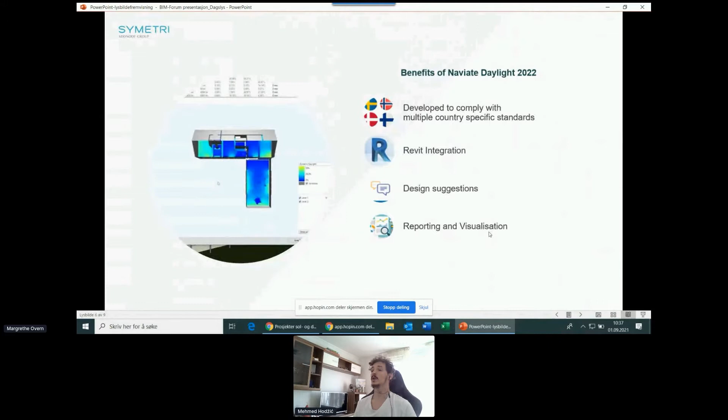When it comes to the benefits, I just wanted to briefly talk about the benefits of Daylight and make some key points clear to you. One of the main key points is that we have developed Daylight to comply with local country-specific standards. All the Nordic local standards are supported within Naviate Daylight. All the different rules that each of these standards require, Naviate Daylight will automatically analyze for you and provide you with accurate data, and accordingly you will know how to act based on the output we give you. So that's a really good feature that Naviate Daylight provides.

Then the second key functionality that Daylight has is the Revit integration. In the beginning, we were aware that a lot of other simulation software requires a lot of external or pre-analysis preparation, like exporting your model and then importing it into another third-party software and doing a lot of other things in order to get your analysis done.

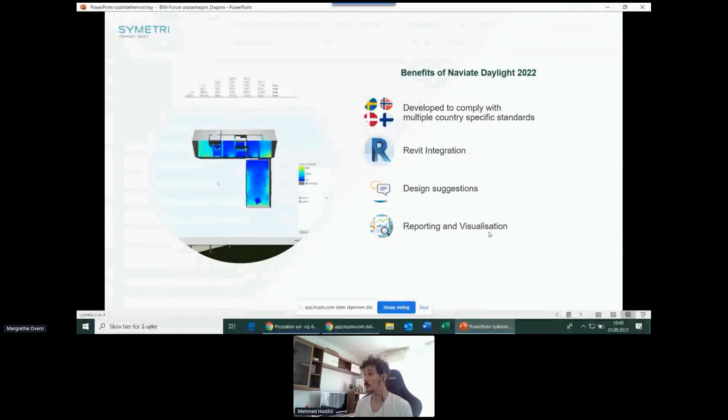These two first key points we are focusing a lot on, in order to give you the best and most straightforward experience when it comes to doing simulations. So basically you don't have to do a lot within Naviate Daylight. You just select which floor plans or rooms you want to calculate, and Naviate Daylight will do everything for you. So the key points for these two are automation, integration, and compliance with different local standards.

Then some more functionalities that are making your life easier, like the design suggestions that Naviate Daylight provides to you. These design suggestions will guide you through the daylight simulation process and the results you get. Based on the results that Naviate Daylight provides, we will give you design suggestions for what the shape of your room should be and what the windows should be, all based on the regulations you have selected for the analysis.

We are supporting Swedish, Norwegian, Danish, and Finnish regulations, by the way. So the design options are quite a good guiding star for you within the simulation process.

And then, of course, we will reinforce all of that with some quite good reporting and visualization functionalities, so you will always know where you are and where you can be with your simulation process. So yes, those are the main key points, and now I would like us to move to the recording.

Yes, I will stop sharing, and you can take the lead for the videos. So I'm just going to share the YouTube video, right? Yep. Yes, you just copy it and share the video. Yes, perfect. There we go. Just a second.

Okay, so I'm going to play the video now. The project that I want us to look at is a 4-story high residential apartment building, and let's say we want to check the daylight performance for apartments found on level 2. So let's see what we have there. On level 2 we have 4 apartments, all 3-bedroom apartments, and we want to calculate the daylight performance for the living areas and the bedrooms.

When it comes to the bathrooms, hallways and storages, they do not require any daylight, so we will not include them in the calculations. I will only select the rooms that do require daylight, which as we said are the bedrooms and living areas. For that, I already have a selection saved, apartments B. So on this floor plan, we will have 16 rooms that require daylight.

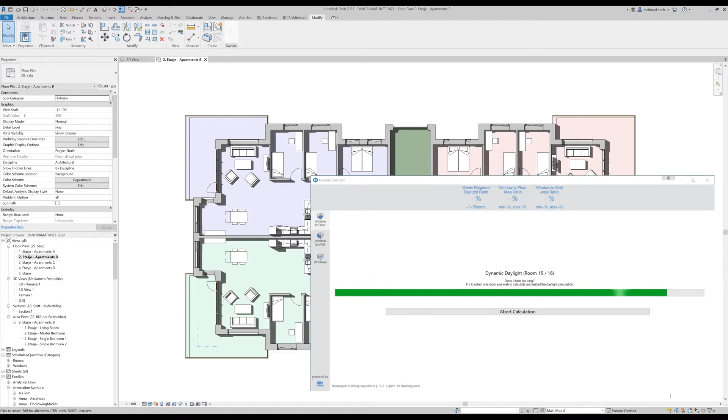Basically, after you have made your pre-selection of rooms, in the Modify tab you will be provided with a Naviate Daylight command, which you can just run and the calculations will start immediately. For the purpose of this demo, I have increased the speed of the calculations so they will not take much of our time. As soon as the calculation finishes, we will be provided with a complete set of daylight data, which we will review in just a moment.

This is the output that Naviate Daylight provides to you. You will be provided with a list of all your rooms that you have chosen for the daylight calculations, and an extensive set of daylight data for each of those rooms. The most important data for you is to be able to see if your rooms are meeting the daylight ratio requirements. That's one. And if your rooms are meeting the average or median daylight factor requirements. That's two.

Some additional data you can see here are the minimum, average, and maximum illuminance values provided by the calculation engine. Additionally, you will see what the calculation height for the daylight factor calculation is, and you'll be able to set it for each of these rooms individually.

Some additional things you'll be able to see are the floor area and the actual and corrected glass area for each of these rooms, which in the end will give you the daylight ratio results.

But when looking at this dialog from a distance, you'll see that on the left side we've provided some green and red indicators for you. Basically, they tell you if each of these rooms is meeting the daylight ratio and daylight factor requirements based on the selected standard.

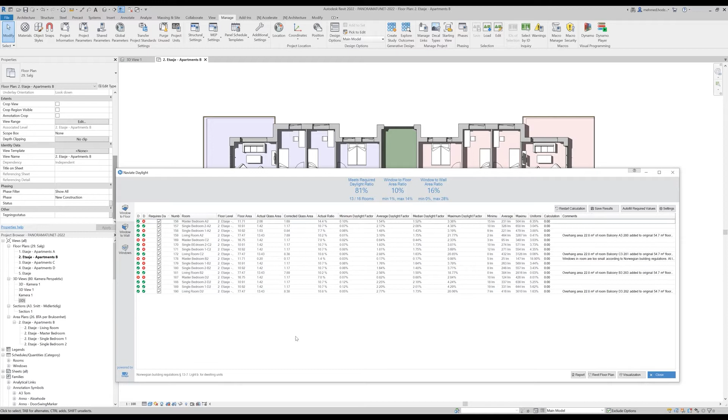That was kind of the overview of the data that we provide to you. I'm going to go back to the main dialog and show you some additional functionalities that we have here, like for example the autofill required values option.

This tool gives you the possibility to predefine some custom required values for certain rooms. Basically, you define a list of rooms and define what the required ratio and daylight factor value will be for those rooms, and define what the calculation height is. Those values will be used only for the rooms you have specified in this list, which can be quite a useful feature when you want to make some specific modifications for certain rooms. But I believe the configurations we are providing are quite enough to do the calculations correctly.

One other functionality that's quite useful is the save results functionality. This one saves all the daylight data we provide and have mentioned here directly on the elements. So it will save the data on the rooms as instance properties—your rooms will get some additional daylight parameters, as will your windows. These parameters saved on the elements can be reused in scheduling and basically however you want later on. So that's another quite nice feature you can use.

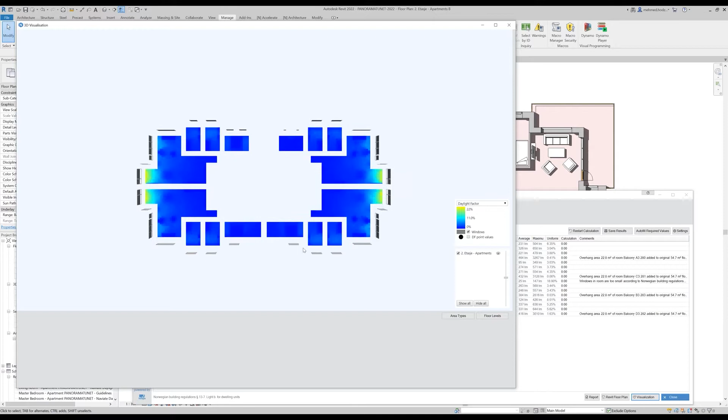One brand new feature is the possibility to show the daylight heat map directly on the floor plan. Before, we had a 3D visualization pop-up dialog that gave a simplified representation of your model or floor plan with the rooms found, and a heat map that had quite a few limitations. Our customers expressed a big wish to make changes to mitigate these limitations.

For example, the possibility to change the color mapping values. By default, this visualization used fixed minimum, average, and maximum daylight factor values to show the colors on the heat map, which, as you can see, tells you these rooms are not getting a lot of light, because the gradients were not set correctly. That's something we will fix with this new feature.

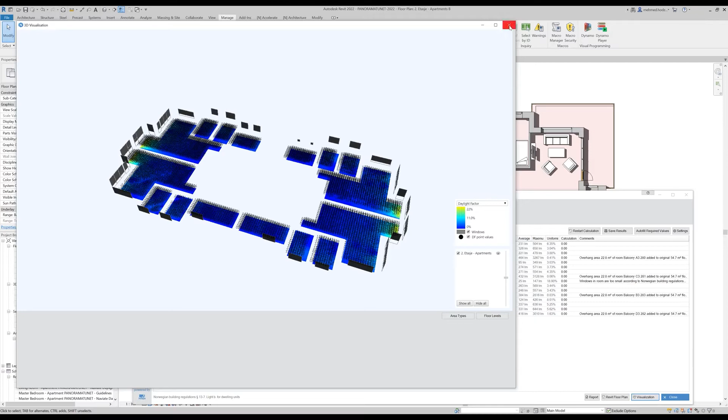When it comes to showing point values, this 3D visualization pop-up dialog didn't provide very good results. The performance was not that good, and the overview of these points was really bad. So we decided to make the necessary changes and provide a much better experience when it comes to showing and working with the heat map itself.

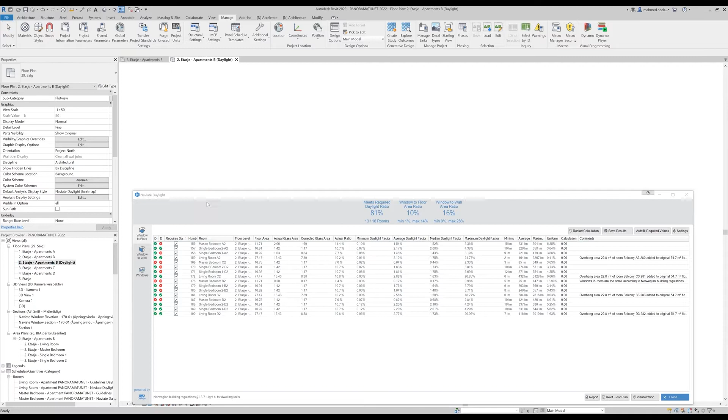In the upcoming version, you will have the possibility, by clicking on the visualization, to create a separate floor plan and show the heat map directly on that floor plan. As you can see, this looks much better now, and this heat map provides much more functionality when it comes to modifying it and working with it.

In the instance properties of the floor plan, you have the option default analysis display style. This is a Revit functionality that we reused within our tool to show these analysis results. Here you can select the heat map style - in our case, this is the Naviate Daylight heat map - and you can also use the point values heat map, which I'll show in a bit.

When it comes to changing the color mapping, here you have all the possibilities you need to change the different values or colors on your heat map. For example, instead of gradient, I could use ranges, so I could better and more clearly see which parts of the room are below the 2% rule in this case, or if I change this to 1 and apply it, which parts have less than 1% daylight factor.

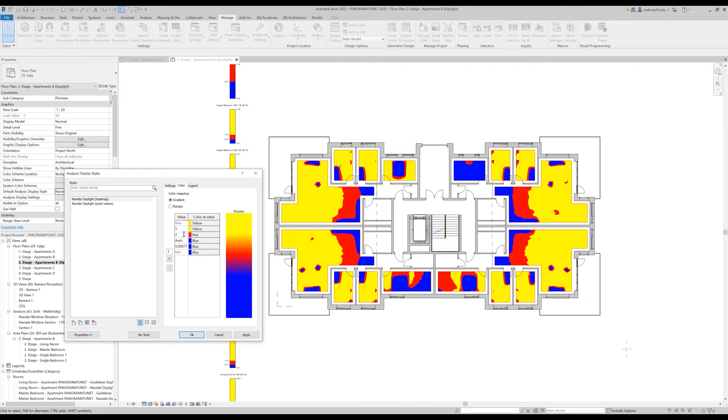When it comes to showing different ranges, you have the possibility to do that. Or even if you only want to show the parts of the room that are above 2% and the parts that are below 2%, you can do that with these options.

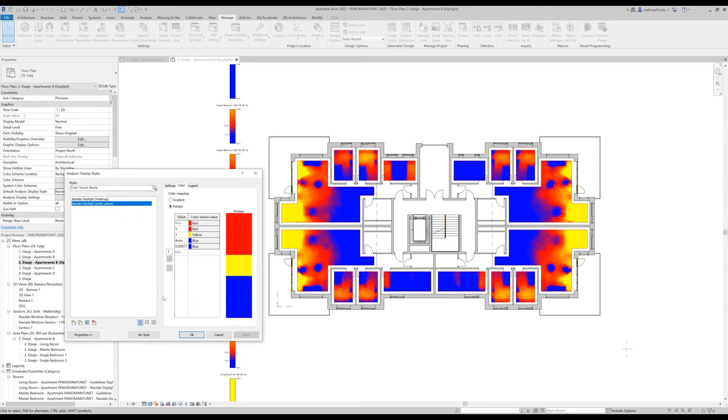You can also show the point values here. If I click on this style, you can create your own styles - either a heat map style, color surface, or markers with text, which is the point values style. So if I click on this one, and click OK...

You can see the grid points shown in the exact same colors as for the heat map, and that's also something you can change. If you want to show the point values here, you can do that, but in that case you will need to make some changes to the scale of the plan view.

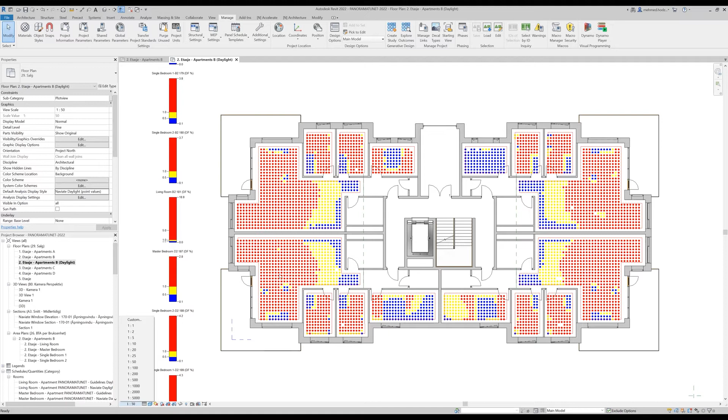For example, if I want to show the point values or text values of each of these points, I'll need to change the scale to be smaller. So for this point to be smaller, open up the style again, and under text annotation you can change it to show all, apply, and OK. Revit performance decreases a little bit, but if you have a better machine, that's okay.

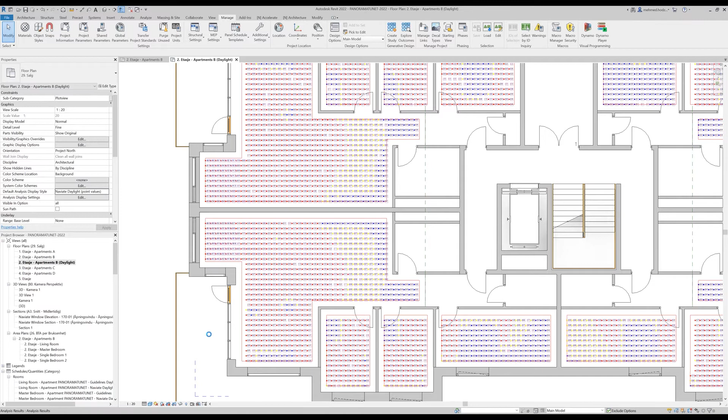Now you can see each point value individually and figure out which parts of the room have less than 1% or 2% daylight factor. So all the possibilities needed to document an appropriate daylight report will be provided to you.

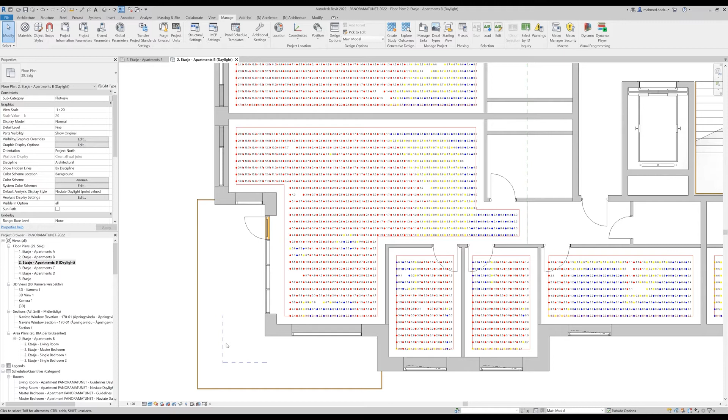If you want to save this in your project, the best way is to save this view as an image, which you can do by right-clicking on it and selecting save to project as image.

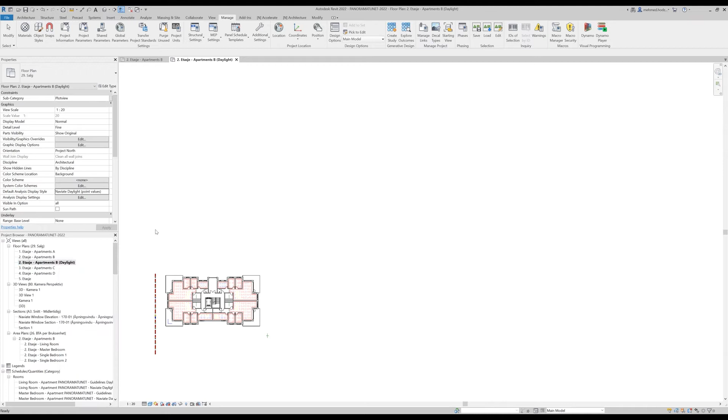But I'm going to bring this back to the heat map. As I said, this new feature provides all the necessary functionalities that were wanted in order to make the heat map functionality useful in its best possible way.

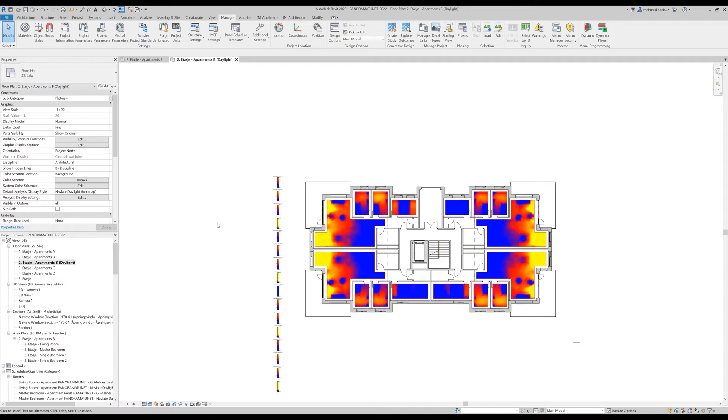So one last documentation functionality that I want to show you is the report. And actually we have one more floor plan documentation functionality, so to call it, and that's the daylight ratio functionality. Basically you can create similar floor plans as for the heat map, but those floor plans will be only related to daylight ratio, as this one is only for daylight factor.

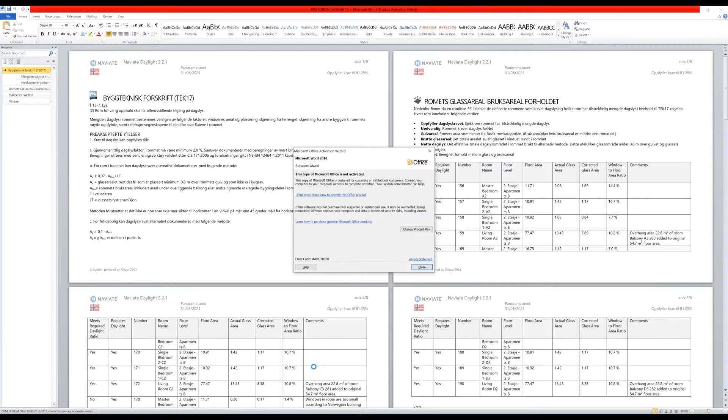And the last one that I want to show you is the report option, and this one generates a report out of the data that you see here. So you will get an automatically created Word report which will be available to you to share with your colleagues or share with a daylight consultant, so they can review the data and give you their opinion. So this is how it looks.

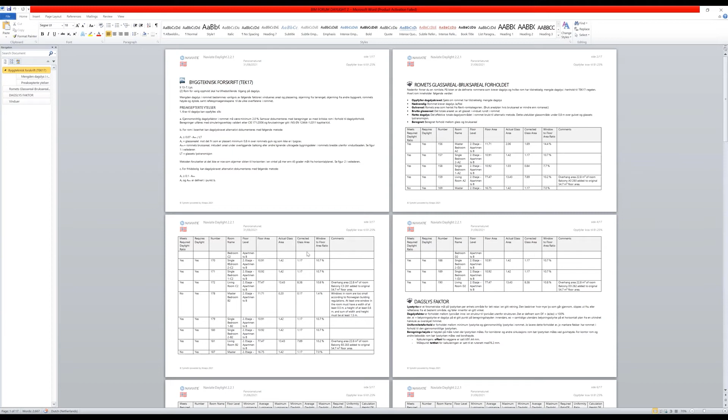We have templates provided for each different country standard. These can be modified, so you can look up these templates in the directory and you can remove any columns that you don't want to show in this report, and you can use your customized template to generate this report. So pretty nice functionalities when it comes to documenting. And I think that was basically it when it comes to documentation.

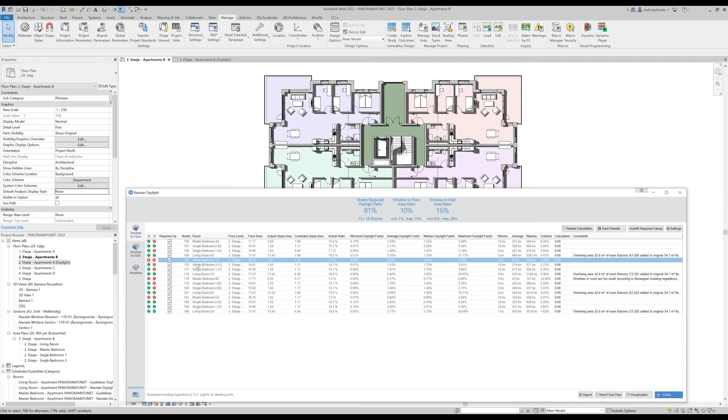I would like to conclude this demo by showing you what the workflow with Daylight is when you want to make the necessary changes in order to meet the requirements of your selected standard. So, for example, I'm going to go back to these indicators here. For this room here, I would like to see what I can do in order to make this room meet the requirements. It doesn't meet both daylight ratio and daylight factor.

I'm going to double click on it. As I can see, no comments provided, so the shape of the room is good, or it follows the guidelines, and the size of the window is okay, but still it doesn't get enough light. As you can see, the average daylight factor is 1.64, which is quite small, and the actual ratio is 7.0, which I guess we are rounding up the values, so that's why it says that it's not meeting the requirements. But anyways, the daylight factor is not satisfied. I'm gonna add one more window in that case, the same as this one.

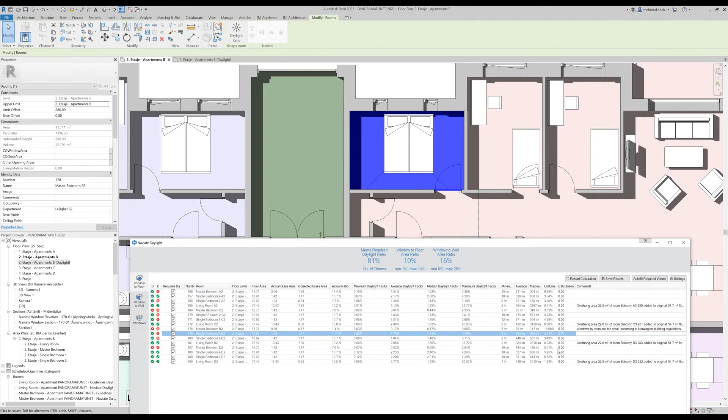And I can do some more changes to some other rooms, like for example this one, B2. If I look more closely, I will see that these windows are quite small. And also when I look at the comment section here, it tells me that the windows in the room are too small according to Norwegian building regulations. And if you hover over it, it will give you more details about the least window width and window height.

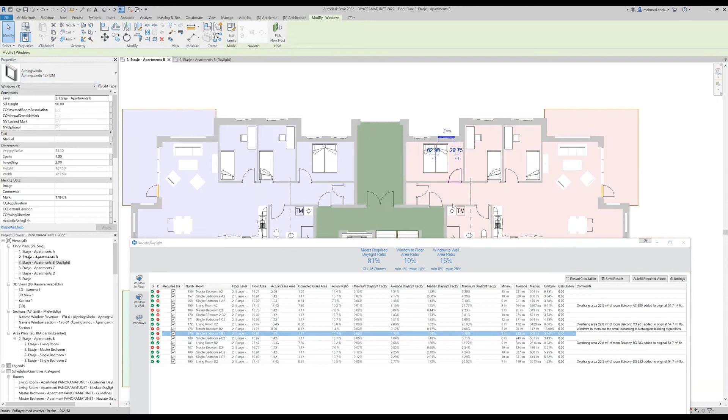But anyways, I can see that they are too small, and the height and width are 52 centimeters, which is quite low. I'm just gonna change the type of the window to be something larger. I'm gonna use these windows. Okay, then let's see some other rooms that are not meeting the requirements, like for example this one. Double click on it. Okay, this is the same room as this one. I'm just gonna create one more window here.

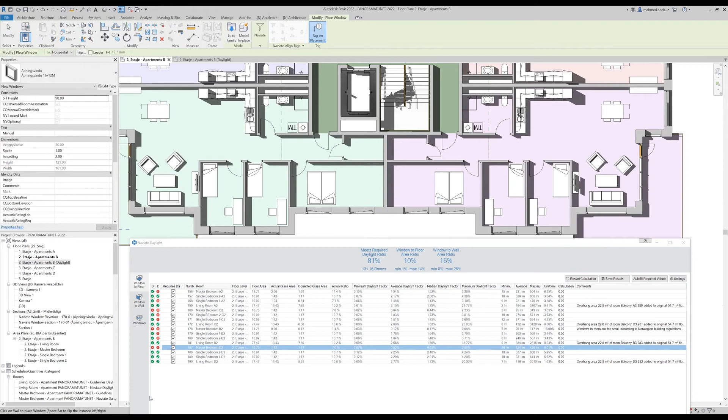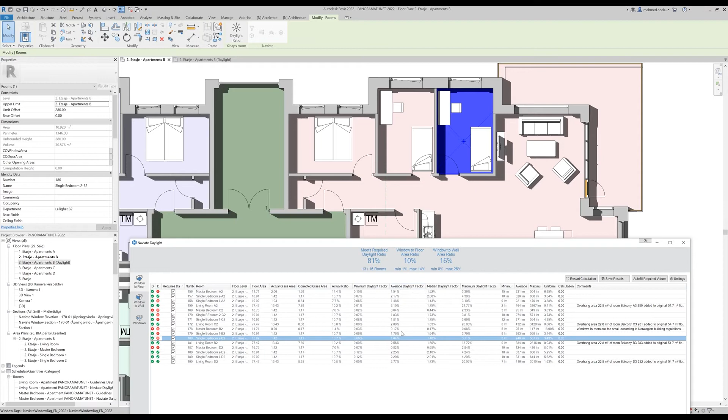Okay, single bedroom. Which room is that? Okay, this room. It meets the daylight ratio requirement, but it does not meet the average daylight factor requirement. And as you have seen in the heat map, these shadings here are due to the furniture inside. The bed is creating this shading, so that's not something that is okay with the regulations. That's not a common way of doing the analysis.

So I would say that if I removed this furniture in each of these apartments and reran the calculation, all of these rooms would meet the requirements. So I think I have made all the necessary changes within this floor plan. In that case, I'm just going to select these rooms again and rerun the calculation.

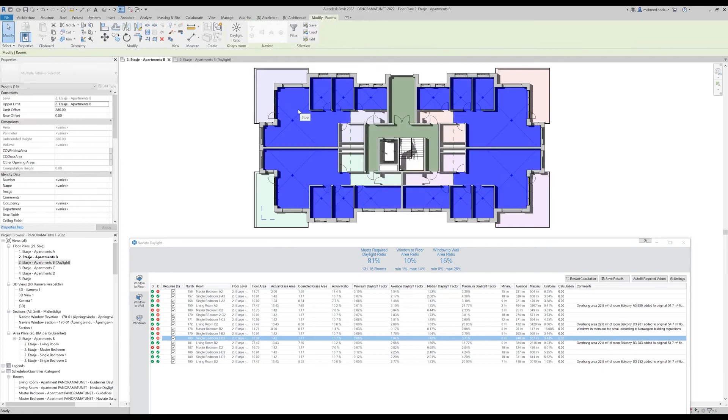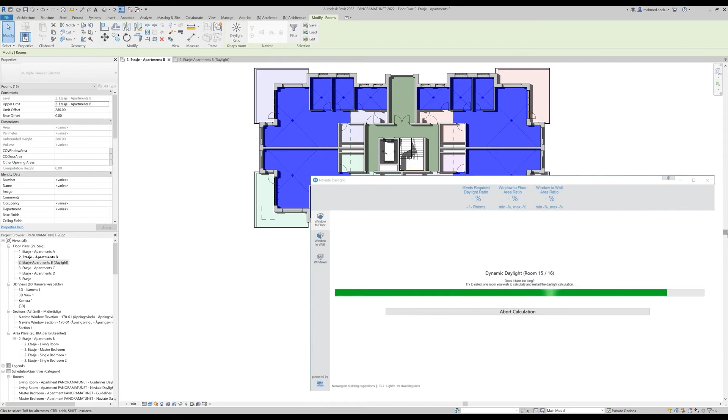It is also good to mention that the amount of time needed for the analysis to be finished and the accuracy of the analysis itself is quite dependent on the radiance parameters that you are able to set in the settings dialog. But that's something that we'll come to as soon as we take a look at these new results. So here they are, the new results. As you can see, everything is green. So all the rooms on this floor plan are meeting the daylight requirements.

So my goal in showing you this workflow was to give you a feel for how Daylight can guide you through the design process and give you some straightforward directions on how you can make your building have the best possible daylight performance.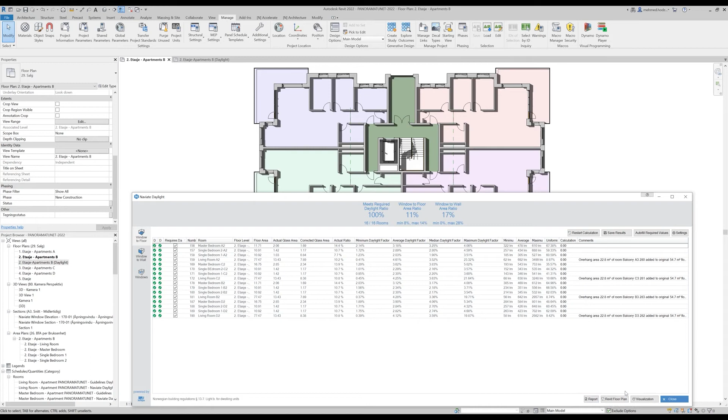So now what you can do is save your results as the best results possible when it comes to daylight performance, and have them available on your elements as parameters. So you can schedule it now, you can create tags. You can do whatever you can with these parameters, and in the end you can create a new report. Or if you want to see the new heat map, you can create a new one.

So let's see how this new heat map looks. So here we have a second floor plan created. Double click on it. Okay, much better. So yes, this is how the end result of using Naviate Daylight looks. You will get blind within your apartment of that much light. So yeah, that would be the end result.

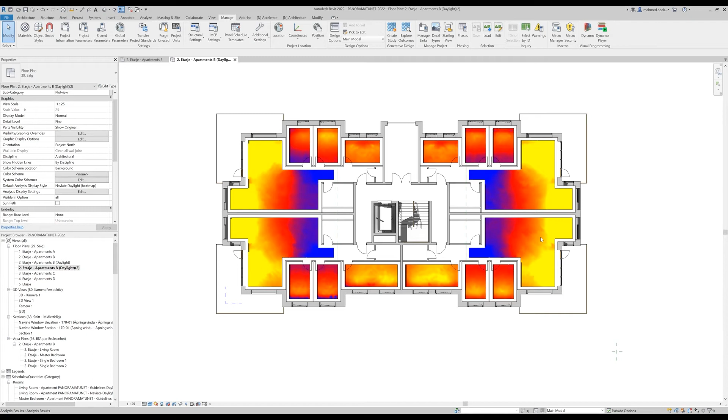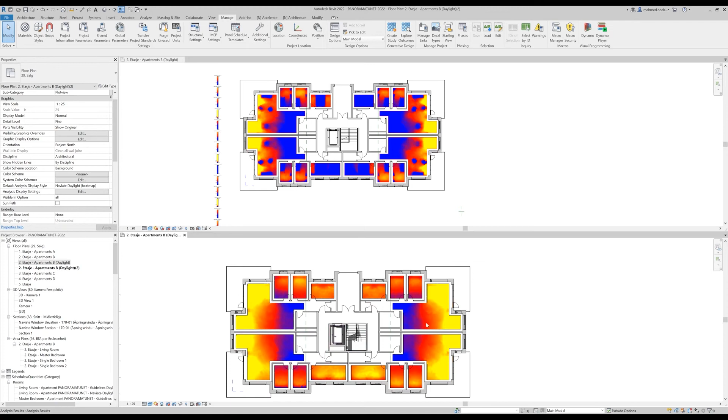And when compared to the one previously, let's take a look on that. This is how it looks now. So we have made some changes when it comes to the number of windows and the size of the windows in certain rooms, and we have also removed the furniture, thus the shading in these rooms is not present anymore. So this is what we get in the end. I'm pleased with these results that I get here.

So then I can continue with my project. Moving on, let's see what the other levels are, what's the performance on other floor plans, and continue and repeat this process again. So in the end, you will meet the regulations and save a lot of time with Naviate Daylight.

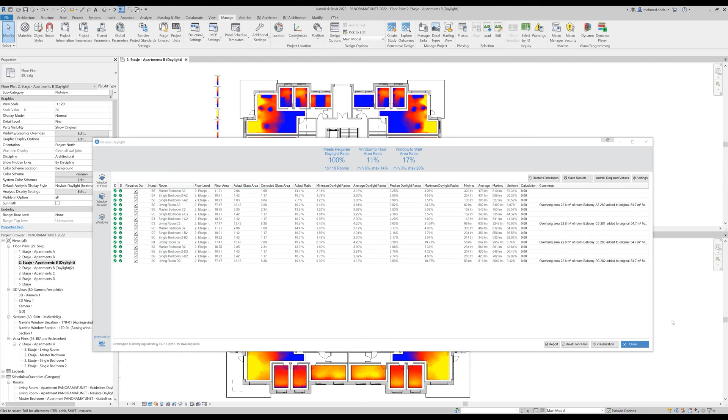So when it comes to the feature demo, I think that would be it. Thank you for following this demo. And for the end, I would like just to go briefly and talk about the things that we should consider before and after doing the analysis. But that's something that we can take on in another video. Thank you very much for following this demo again.

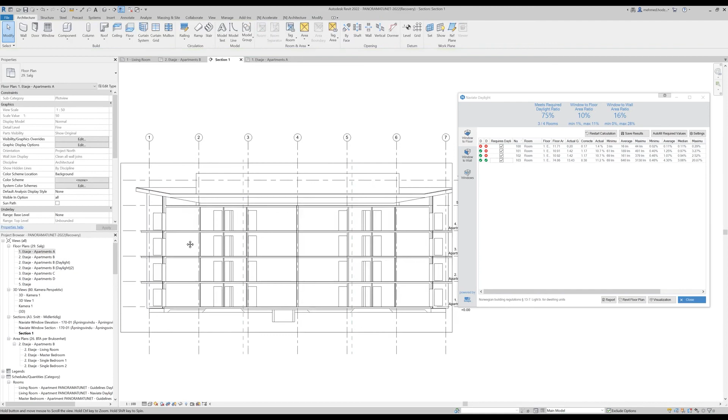So that's number one. Number two, when it comes to balcony rooms, I'm gonna open up this section view here. The balcony rooms need to be named correctly, or better said, according to the names specified in the settings. So whichever name you have specified here, please use any of these to name your balconies, because by that we are filtering the balconies out from the main calculation, and we will only include them when we are adding them as overhangs to the rooms below. So always keep in mind to have the correct namings on the balconies.

And when it comes to some other things regarding the balconies, you should always keep them below the height of the adjacent rooms or the normal rooms. In that way, the balcony rooms will not take precedence instead of the normal rooms. So, simple rule, always keep the balconies named correctly and keep the height below the height of the adjacent rooms.

So that's number two. Number three that you have to keep in mind is the material properties, or more precisely, the transparency property on windows for daylight factor. So for example, if I take one material property on the windows, and let's say it's this one, glass, and you would want to have the transparency on this window to be 60.

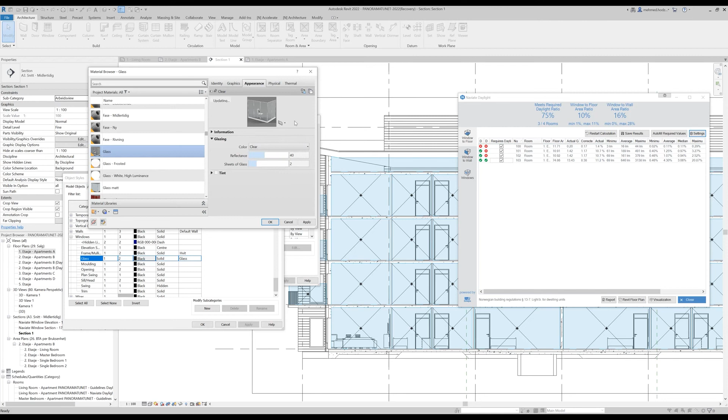And if you go to the graphics tab here, because I turned on use render appearance, the transparency is saying 60. So always keep in mind that if you want to set the transparency, in that case you need to define the reflectance in the appearance tab, because as I said, that's basically kind of the opposite of transparency. And this is the property that Naviate Daylight uses to figure out what the transparency or the reflectance of the window is. So that's number three.

When it comes to workshared projects, so if many people are working on one project and you have worksets, and some of those worksets, let's say a workset of windows, is locked by another user, you as the one member of the project that's assigned to do the Naviate Daylight calculations, it's not possible to save the results to the windows in this case, because that workset was locked. So that's not something that we are handling right now.

So in order to save the results to the model or to a workshared model, all the worksets need to be relinquished, and then you will have the possibility to save the results correctly. That's number four. Number five is when you have a project with design options. So if you have design options and model elements found in those design options, that's not something that we're supporting right now.

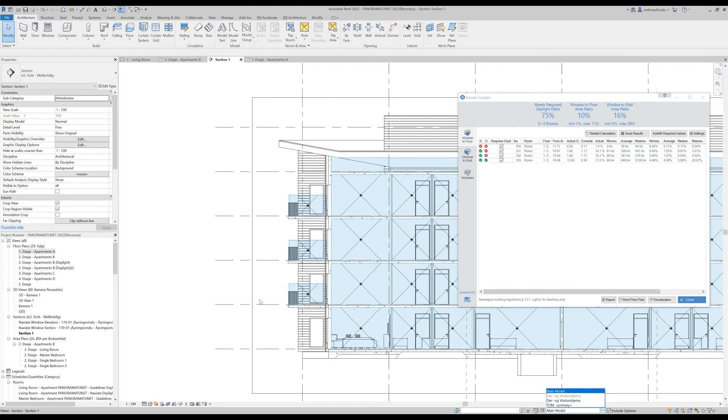Because when we are sending the model to Radiance, we are sending all the model elements found in this project, doesn't matter in which design options they are found. So in order to get the correct results, you need to have model elements only in the main model. In that case, you will get the correct output. A similar thing goes when it comes to design phases. So if you want the correct output of Naviate Daylight, all the elements that are used for the calculation should be found in one phase.

So, for example, if you have your window of this room in one phase and the room and the walls in another phase, it will not work because we will not identify that wall or that window that's in another phase as part of this calculation, so to say. So please keep that in mind, that's still something that we are trying to integrate within Naviate Daylight. And your opinion would be quite useful here to know what the value of these improvements is. I'm specifically talking about the design options and the phases.

So yes, I think those were the things that I wanted to show for the things that you should consider in Daylight.